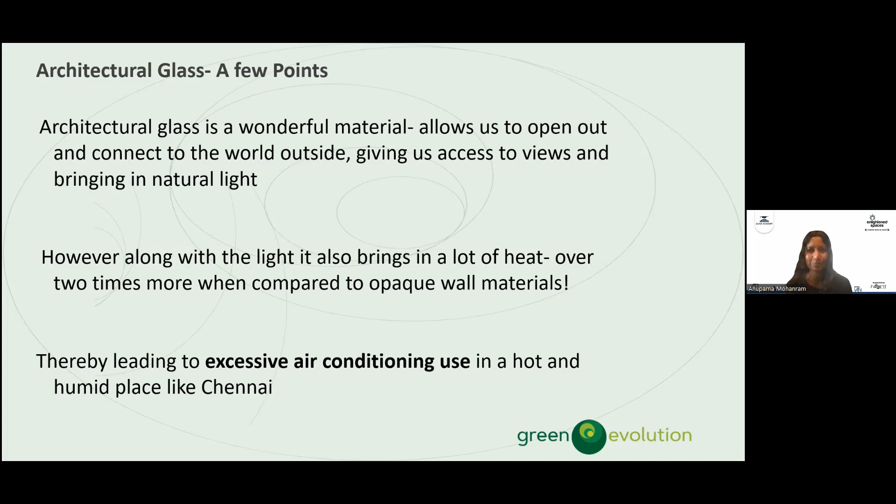But the biggest disadvantage of glass is it also brings in a lot of heat along with the light, right? And when compared to materials like brick, it actually brings in double the amount of heat. So that is an issue. Especially in places like Chennai, which is a hot and humid place, that amount of heat results in excessive air conditioning. So how can we use this wonderful architectural glass, but prevent the heat it typically brings in? So today I'm going to talk about a few strategies that we could consider when we design our buildings. I've divided it into two parts.

Okay, the first strategy I look at is passive design strategies, right? So design that goes into the building. The first step in passive design strategies is you ensure sensible and judicious use of glazing. So what is that? Basically, you orient the building in such a way that, for example, in Chennai, not much of the east and western exposure is covered by glass, right? And you should also know how much glass you're using in a hot and humid place like Chennai. And then, of course, you need to make sure that the glass you use is adequately shaded. If you have sunshades for glass, that's what will cut out the direct heat gain. So these are all passive strategies.

A lot of it depends on the site, right? Let's say on your site you have a very tall building on the east. Now that's going to cut out all of the heat and the light that comes in from the east. So you can actually use more glass on the east. So everything is relative to the context. That's what happens in the initial stages of architectural design, right? See where your site is, make sure your building is oriented in the right direction to prevent a lot of heat gain from coming in, and also see what's surrounding it. And of course, ensure there are trees. All that will help prevent the heat gain through glass.

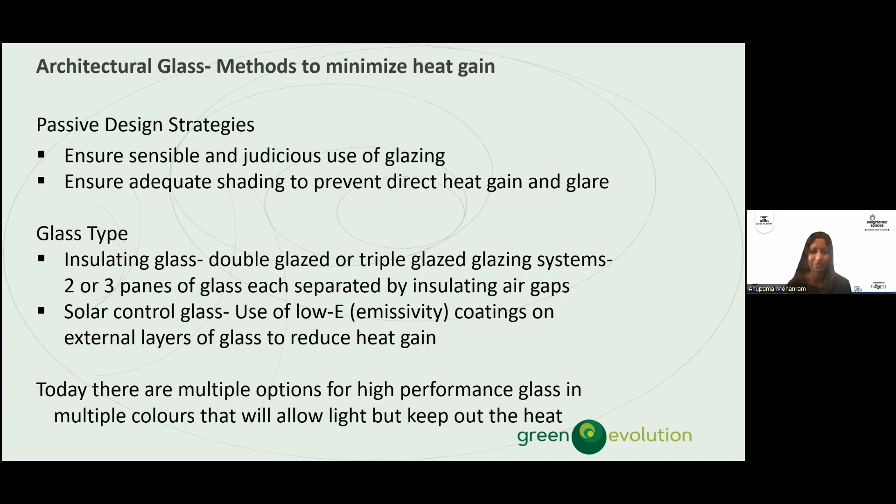And different colors, right? So as an architect, let's say 20 years ago, we would not have all these options. So the glass options are also getting better and better. So when you pick the type of glass, right? I talked about insulating glass and I talked about solar control glass. So what are the factors? I've located my building and now I've determined what the window sizes are. Now I need to pick the glass. So what are the factors that I would look at when I pick a glass?

So there's a factor called SHGC, right? Which is the solar heat gain coefficient. So basically, if the solar heat gain coefficient is lower, then the heat gain is lower. It's the amount of heat that the glass allows to enter into the building. So the SHGC value is something that we have to be very selective of. The lower the SHGC, the lower the heat gain.

The next factor that we look at, of course, is the U value. U value is the amount of heat the glass will actually reflect, in the sense it would insulate, it would not let it in, right? So SHGC is the amount of heat that comes into the building, and U value is the amount of heat the glass will prevent from getting into the building. So again, the lower the U value, the better the insulation. It insulates the building from the heat outside.

So SHGC, U value. And then the third factor we look at is: what's the point of having glass and not having natural light inside? If there's not enough natural light, then we end up with not a very environmentally sensitive option. So pick a glass that also has a higher VLT, visible light transmittance. The higher the VLT, the higher the light transmittance.

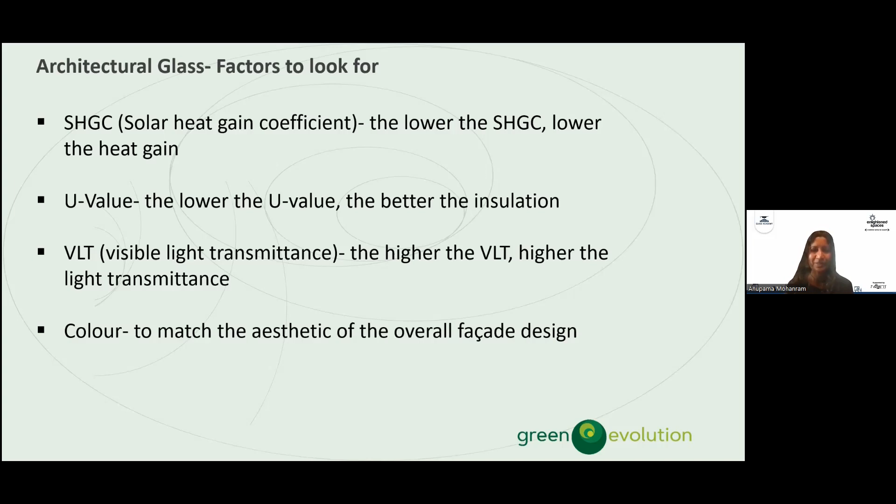So that was a brief introduction on glass itself, what we should look for, how we should start off with designing to ensure that the glass that you use does not bring in as much heat, but also lets in light. Right. So now I'm going to talk about a couple of our case studies just to explain the factors that I mentioned to you earlier, how we went about looking at the passive design strategies and picking the glass.

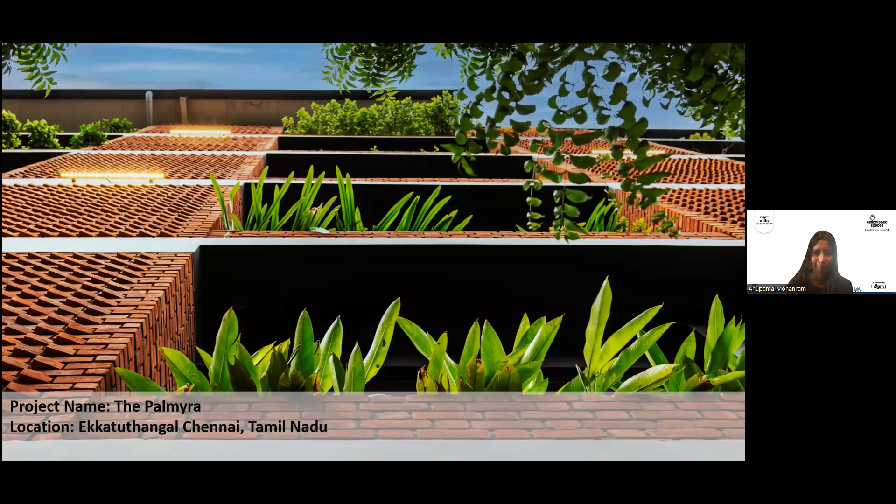So this first project is an IT building. It is in Ekkatuthangal in Chennai. The name of the project is the Palmyra. And we completed this building last year, 2022. It is about 11,500 square feet building. The site area is 11,500. The built-up area is about 28,000 square feet. It is a stilt plus a 4-floor IT building.

So this building was awarded the LEED Gold certification in March early this year. We also won the best green building design for this building. So just some overall facts on the building. Very highly energy, water and resource efficient. And we looked at occupant health and well-being, right? Because that's very important. Indoor air quality, indoor light, ventilation. And people have to be comfortable, right? I mean, that is the ultimate of building design, right?

We all spend about 90% of our time indoors. So even when you're using glass, you need to be conscious of the fact that you don't want to let in too much heat because people will be uncomfortable, right? So it finally comes down to occupant health. So this one was designed with occupant health in mind. And then you notice the striking aesthetics here, which we are very conscious about.

So you must have seen all of these glass buildings in Chennai. Some of them, to me, are just a mimicry of buildings in the West, right? When I look at Old Mahabalipuram Road, when you're driving in Chennai especially, there are all these glass facade IT buildings facing east and west. Can you make it a little more grounded to the place? Can it be like a contemporary design, but yet look like it's rooted in place and time? So, be a little bit more conscious about the facade and the design aesthetics also.

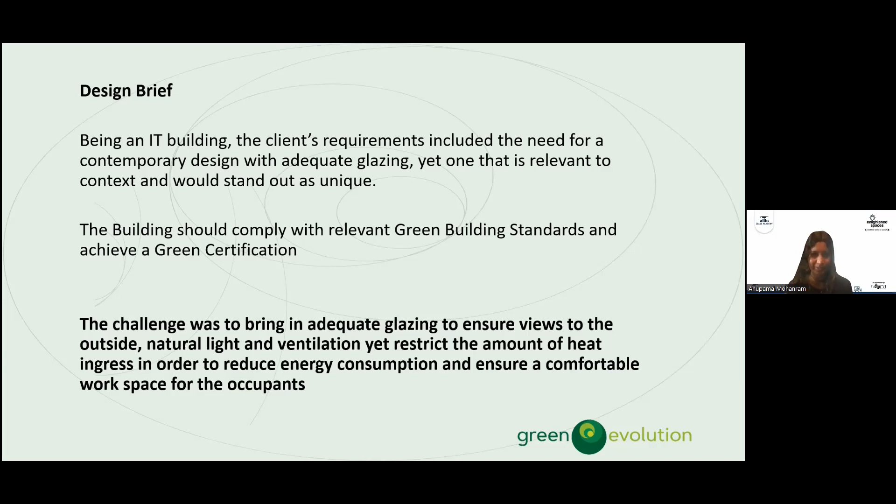So what did we do here? Thankfully for us, the site was a rectangle and the longer sides faced north and south. So in Chennai, most of the heat comes from the east and west. So if you can shield the east and the west from direct heat, then you have a better chance of making the building cooler. So the way we oriented the building on site, we used the east facade for the lobby and the lift, and the west facade was the toilets and a staircase. So the workspace in the center had north-south glazing, so we were able to eliminate a lot of the heat coming in from the east and west by orienting.

So this faces south, this faces north. So we were able to get air circulation, cross ventilation into the building with the breezeways from the south. So that way, we could actually use a lot of glass. In this building, if you look at the north and south facades, 50% of the facade is actually glazing. So the first step was orientation. Once we had oriented the building in the right direction, the second step was to make sure that all the glass that we used, because 50% was glass,

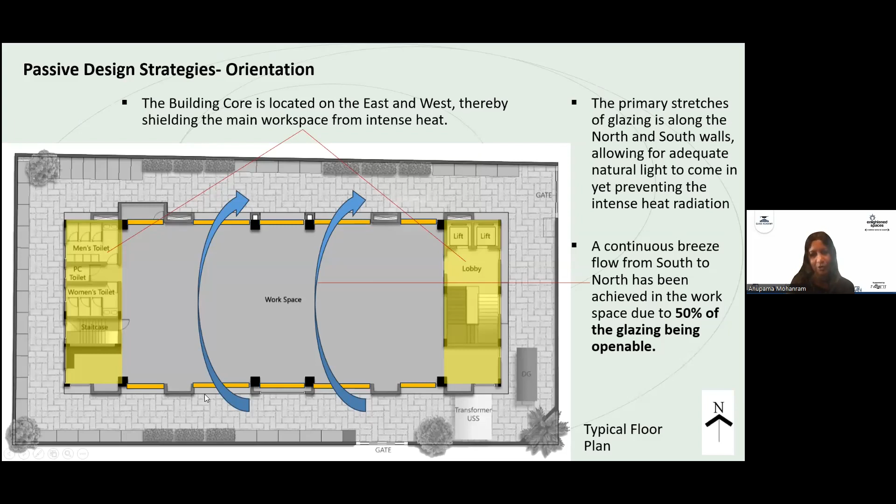So through this sunshade and these boxing outs that we did, you can see the box out here, these gray boxes. So those are actually wardrobes. So they could functionally use it from inside as wardrobes, but it also ends up providing shading.

I also wanted to mention that 50% of these glass windows are operable glass. So if you look at a lot of the IT buildings, they have fixed glazing, right? That's something that we don't do, because you need to ensure that there is some amount of natural ventilation. Let's say one day the air conditioning doesn't work. A cyclone like this that happened, it's obviously something that you can't control, and you're stuck inside if it's fixed glass. Right? So we always ensure most of our glass is operable.

So even if they want to run the air conditioning, considering it's an IT building, we are giving them the option to open out at least 50% of the windows. Right? So that gives them the flexibility. Let's say somebody on one floor doesn't want to run the air conditioning. If we didn't give them that, then it's going to be very hot and constrained, and there's no other option but to crank up the air conditioning. So a strategy would be to ensure that at least 50% of your windows are operable.

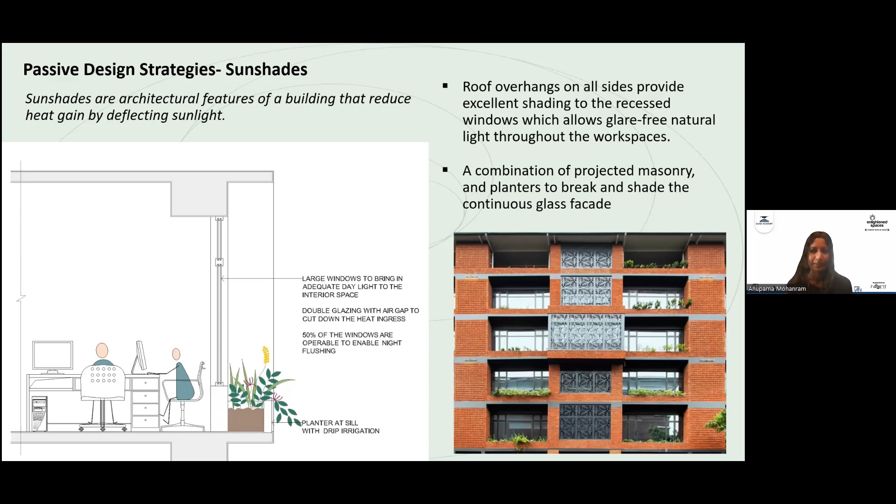So when you look at shading, we talked about sunshades, we talked about vertical masses that would prevent the heat from coming in. Another type of shading that we use a lot in our buildings are jalis. Jalis are actually a very traditional feature. In this building, we customized a jali with a leaf pattern. So it becomes a unique identity for the building. And also, this jali is in front of the glass, so it again acts as a shading element, right?

And not only a shading element, it forms interesting shadow patterns. There's a lot of light and shadow play. Again, it makes the space actually inspire people. It should be a space that you're happy to go to and observe different features rather than it being very bland.

So these jalis are a very effective way to shade glass. It brings in the filtered light and also the filtered heat, and also ends up forming different patterns. In this case, these are metal jalis that we use, but you can customize it to any design. So it's a very interesting aesthetic feature that also acts as a shading element for your glass.

So if you look at this building, some statistics: like I told you, on the north and south facades, the WWR is 0.5. WWR is the window to wall ratio, right? So 50% of the wall is windows in this case. So we picked a glass called Icy Menthol. It is in a Saint-Gobain series called the KT series. It's made with a nano silver coating. And we picked a glass that's a neutral and gray tint.

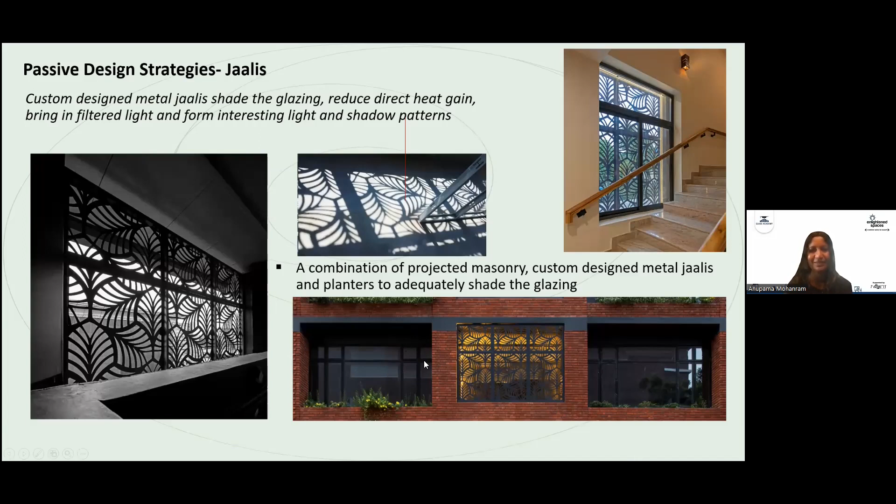If you look at the facade, we wanted a glass that is a little grayish or neutral to go with our scheme of the dark gray and the exposed brick that we were using on the facade. So we decided on that. And this Icy Menthol glass had a visible light transmission of 37%, and a solar heat gain coefficient of 0.29. So this is the glass that we decided to pick, and it's in a DGU, which means it's a double glazed unit. So it's got two panes of glass: 6 mm, a 12 mm air gap, and another 6 mm glass, right?

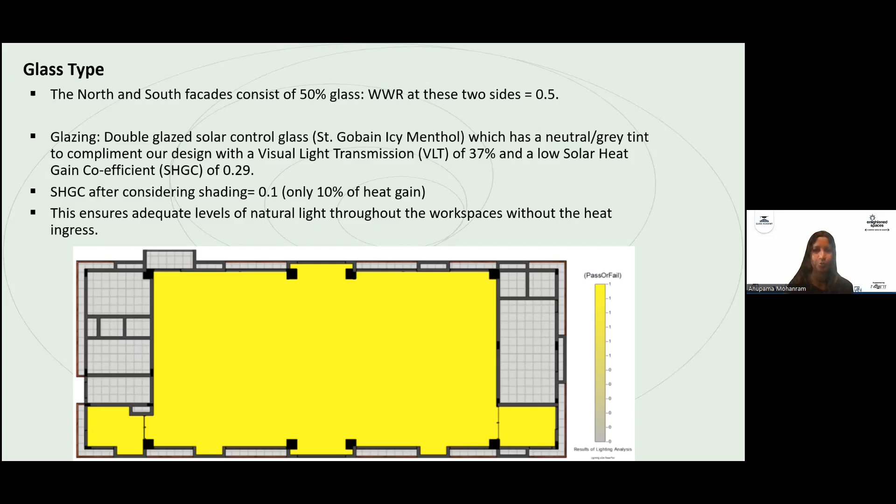So if you look at these statistics, what's interesting here is although the solar heat gain coefficient of the glass itself is 0.29, after considering all the shading that we did, all of the projections and the vertical masses, the SHGC came to 0.1. So it's reduced the amount of heat coming in through the glass. If we didn't have the shading, the SHGC would still stay at 0.29. So with your design elements, with your aesthetic elements, you can actually do a lot. So 0.1 means that only 10% of the heat gain is actually coming into the building through the glass, right? So with shading, you are able to reduce the heat gain even more.

So this is just a conclusion slide for this project, just to give you a little bit more detail about this building.

The walls are all made of AAC aerated concrete blocks, which actually is very, very insulating. So the walls reduce a lot of the heat from coming in. And the heat resistant double glazed windows that we're doing, adequate shading. We have a 60 kilowatt rooftop solar photovoltaic system on top, which takes care of a lot of their energy needs. We have installed automatic sensors to control all the equipment, daylight sensors. So that way your energy is also very optimized in this case.

Water conservation was a big part of what we do usually. So sensor controlled water fixtures, on-site wastewater treatment. So we ensure that all the wastewater is treated and is reused. In this case, it's reused for landscaping and for the flushing. So we have another water tank on the rooftop that is a flush water tank.

All of the rainwater that falls on the roof is 100% harvested. So the idea is, it's a zero wastewater discharge site, which means we try to harvest all the water that falls in the site itself. Either we collect it and reuse it, or the rainwater that falls on the roof is actually collected into the sump and reused, or it's percolated into the ground.

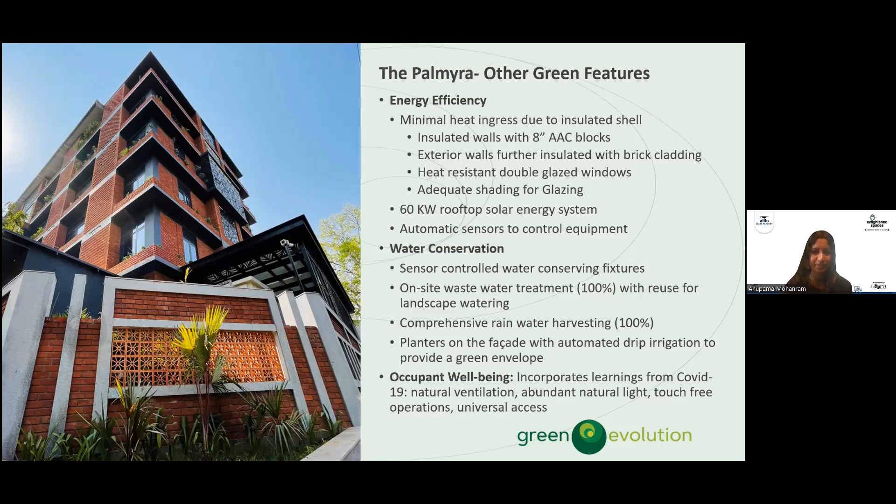So yeah, starting from the glass, it's the overall, holistic health, environmental health of the building that you also need to look at and understand when you do the design. It's not only, you pick the glass and leave. You need to understand what other factors work. Like I talked about sensors, timers, daylight sensors. So all of that, which will end up reducing your energy consumption. So these are just some slides that I have, some photographs of the project. This is the east facade on the left here.

Okay. So the second case study that I'm going to talk about is the Integrated Central Command and Control Center. This building is a government building, and we designed this for the Greater Chennai Corporation. This is actually a central command center for the city of Chennai. So all of the services in Chennai, like the traffic, the police, everything is going to culminate here. So there is a huge video screen space. So all of these services sit inside and they observe everything that's happening in Chennai.

Let's say for the rain, the cyclone ravaged area. So they would get the information on screen, what is happening where. So the people would be clued into where to take action. So this is the command center. It's actually just behind the Ripon building. If you know Chennai, there's a heritage building called the Ripon building that is here, which is the headquarters of the Greater Chennai Corporation. This is our new building. So it's coming up just behind the Ripon building.

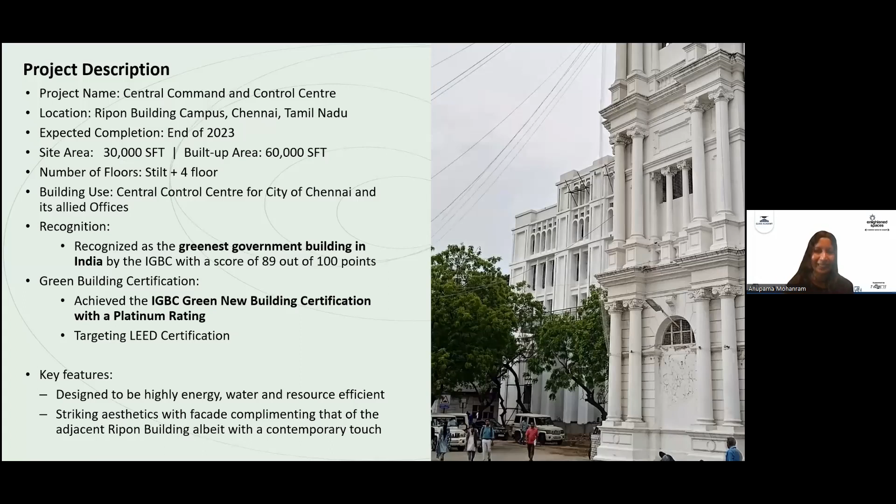Again, they wanted it to be a very modern building with a lot of glazing. And of course, they wanted it to be as green as possible. And they wanted the highest possible LEED and IGBC rating for this building. So again, the same challenge here, right? Very similar to the Palmyra. How do we do this?

We need to look at glass with low heat gain. How are we going to match the aesthetics with the amount of glass that we're using? And how do we, of course, reduce the energy loads?

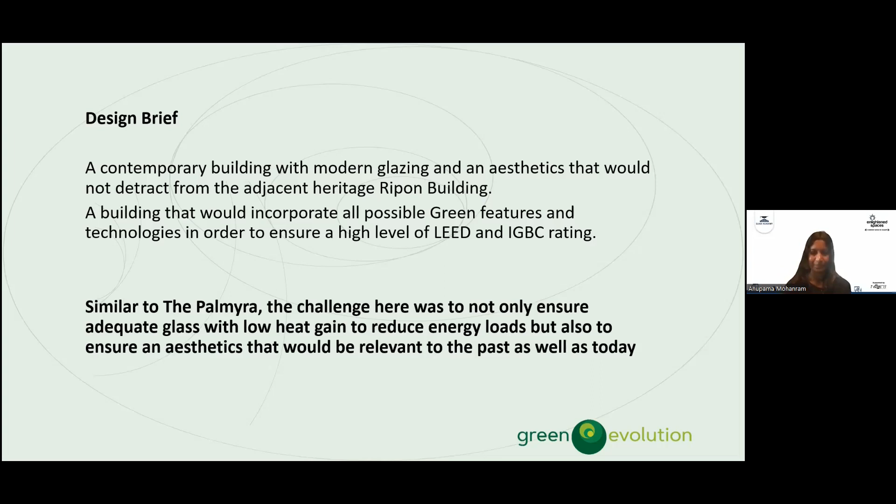So there's a row of trees on the west, which we retained because the west is where most of the heat comes in. Again, why is it important to look at the site? If it's an open field, getting a lot of radiation, I would be judicious about using glass there. So a lot of it also depends on your site. So in this case, although we used a lot of glass, it is actually less than 50%.

This is the services part. There is not enough light coming in the center of this building. So we have a courtyard that is cut out in the center. So we do a lot of daylight simulations to see what is the light, because we wanted the building to be well lit from inside, especially in the primary workspaces.

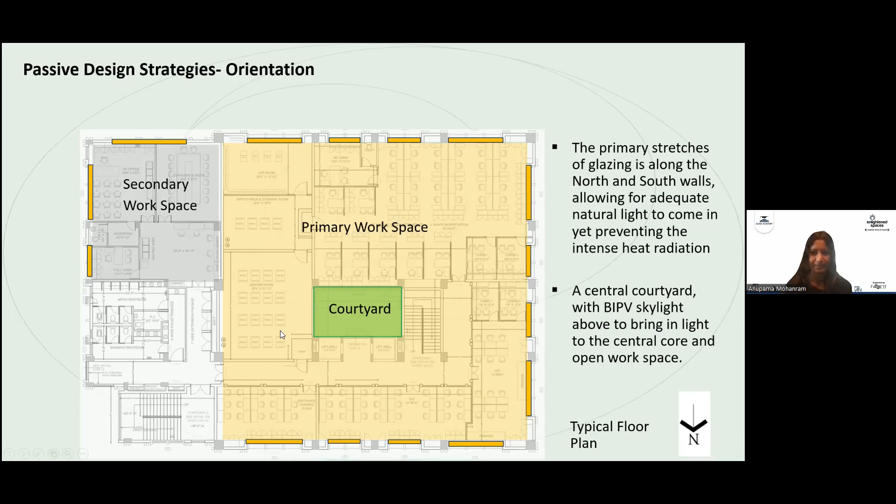So this courtyard has a BIPV roof on top. So that lets in adequate light, but also screens off the heat, and ensures that this workspace surrounding the courtyard is also well lit. So again, the same similar strategies like I mentioned earlier.

And here, if you look at the first strategy, like I said, is shading, right? So in this case, we have roof overhangs, which is the horizontal shading. But unlike Palmyra, the previous project, we also have vertical fins, right? So it's not only horizontal shading. So this is the glass that you see here, but it's broken by these vertical fins.

And this arch also, again, was a factor in design, right? When we designed the windows, we wanted the arches to simulate the Ripon building that was right next door. So it has a little bit of the traditional, the cultural context right there. And similar to the Palmyra, we have planters on alternate floors here. So the second and the fourth floors have planters, and that would have an automatic drip irrigation system.

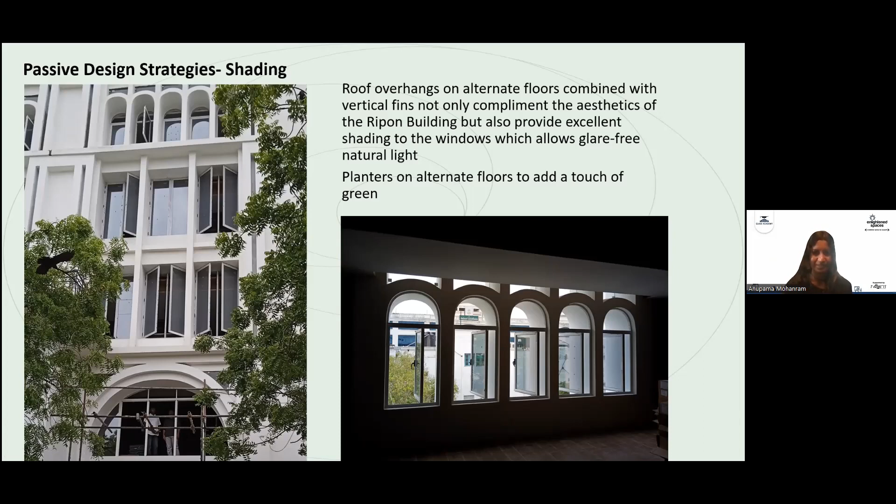So this is another view of the building. You see some of these trees on the west that I was talking about. So again, our window wall ratio was 0.5, which means about 50% of the wall is actually glass in this case. We picked the same glass as we did for Palmyra, because again, we wanted the same neutral tint, and the VLT and the SHGC helped us with the lighting even for this space.

So we use the same Saint-Gobain glass, which cuts the heat gain that comes in. The SHGC of the glass is 0.29. But when we considered the shading in this case, on the east and west facade, the SHGC went down to 0.15, which means it's letting in only 15% of the heat. So from 0.29, just because of the shading, you see how much it is actually cut down.

But what was interesting is in the north and south facade, SHGC went to 0 because of the vertical fins that we have done. So there's no heat gain coming in, and the visible light transmittance was maintained. So again, in this case, it ensures a lot of natural light without the heat into the workspaces.

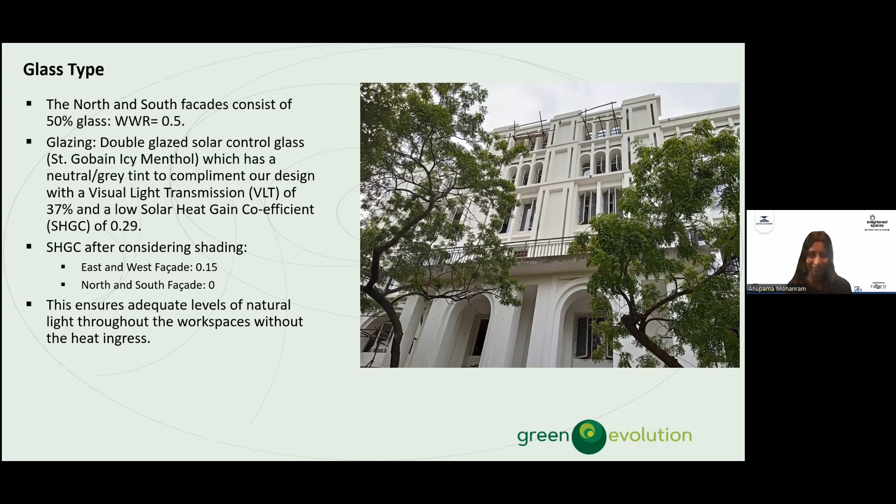So this is another image of the building from a corner. All these vertical features that we did, it's an aesthetic feature, but it also is functional because it offers shading to the building. Let's say if we didn't have it, it would be one continuous layer of glass, right? And that would only end up bringing in the heat. So like I said, it's an aesthetic that complements the Ripon building style of architecture, but in a very simplified and very contemporary way. It also uses a lot of glass. It is a modern glass building, I would say.

I just want to conclude by saying, if you look at the past two case studies, I guess my point would be, can we use glazing in our buildings by taking advantage of its features? But at the same time, can we also bring in design elements that would enhance the charm of glass? So if you look at this building versus, like I said, a straight facade, it is actually something that makes you think, right? It's charming, and it enhances the glass itself.

And a big part of what you should all consider is, of course, we need to use glass, but we need to ensure that you are able to cut down the heat gain and the glare that comes in. But also, can you use it in a way that the buildings stay relevant to our context, stay rooted in our context, and pass down the culture to future generations? So that is the future of glass. So if you can bring out the context of where you're building, and yet use the technologies that are there today, to design buildings that...

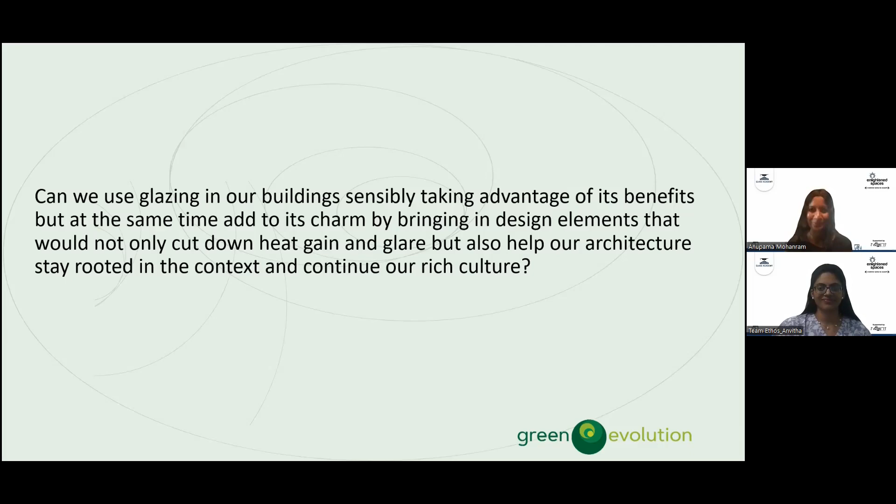Hi, ma'am. Thank you so much for shining light on the importance of glass in green buildings through your presentation. Your thoughtful exploration of the role of glass in creating environmentally conscious yet aesthetic spaces, as evidenced by the examples from your projects, has provided valuable insights that undoubtedly enriched our viewers' understanding of the role of architecture in fostering a greener world. We have a lot of learnings to take away today, but we're also curious to know more. So I would like to take this opportunity to ask you a few questions.

Sure. So to begin with, the term green building is often used, but not completely understood by many in the design community. So as an expert, how do you define the concept of green building, and what are some common misconceptions people have about green building?

Well, to define a green building, I would say it's a building that's been planned and designed with the environment and occupant health in mind. So there are two things here. A green building would not only minimize the destruction to our environment, but also ensure the occupants are healthy inside the building. So these are the two big points. Starting from the site context, we would ensure that we preserve any existing trees on site, because that's what makes the surroundings cool, right?